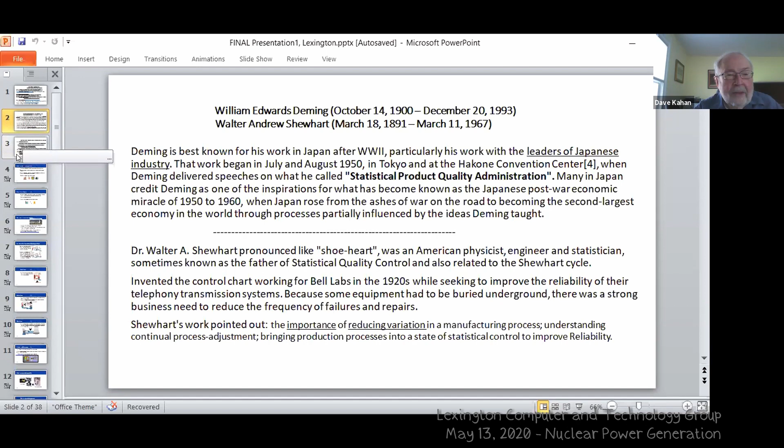Number three, the significant points of interest. Oh Steve, can I move that? You are sharing the screen. Can I move that green thing out of the way? How do I do that? Steve? David, it looks fine to everybody else. I don't think it's a problem. It's only you. Oh, it's only me? Yeah. Well, because then I got to move this, I got to move my slide up and down, because I'm reading it as I go along.

Okay, now what are the forms of energy?

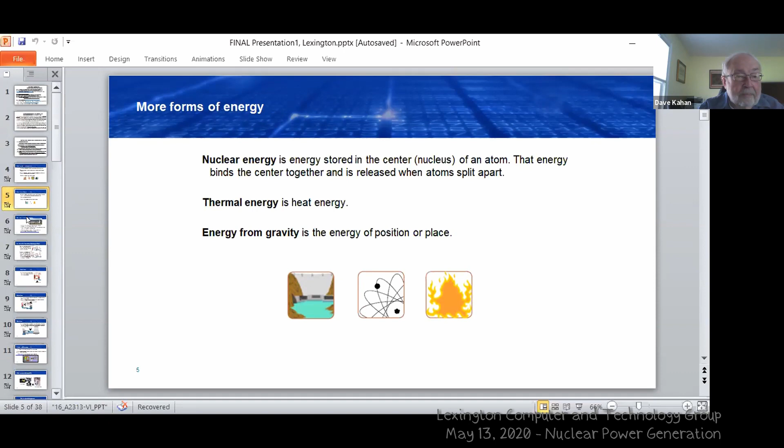I'm not going to go into all that, but atoms are split to produce steam. The steam turns the turbine, and the turbine produces a magnetic field, which in turn creates electricity.

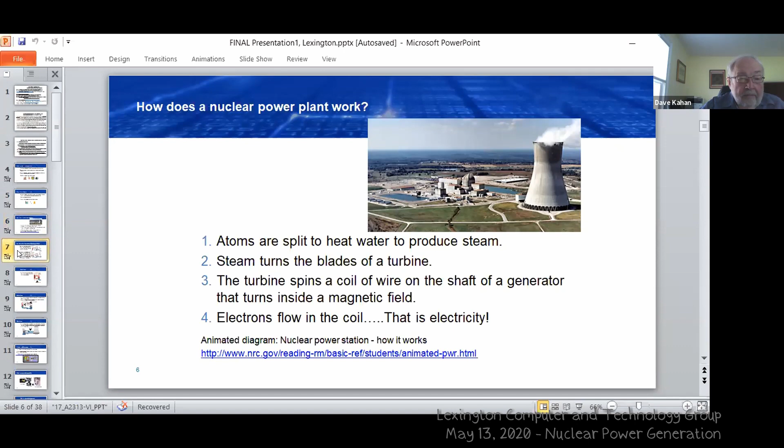Now, getting into the nuclear part of it, there are two types of nuclear power plants: the boiling water reactor and the pressurized water reactor. And we all know that when you put water under pressure, it doesn't boil at 212. It boils at a lot higher temperature.

With the boiling water reactor, I don't recall we ever really made those, because if you want to know the truth, I wouldn't want to work in a power plant that has radioactive water flowing through those pipes. That's just ridiculous. But the pressurized water reactor is much safer, where you get two different cooling channels.

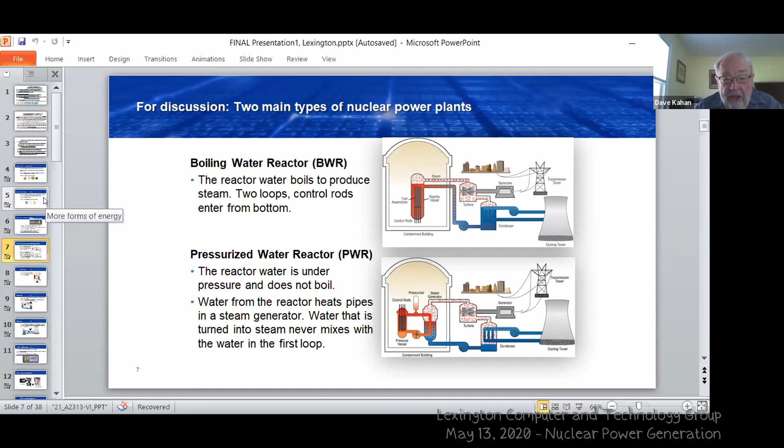And the other thing that comes up in the piping system is - I don't know how many of you guys are software engineers - but how do you predict the reliability of pipe? What you're really talking about is the reliability of the materials the pipe is made out of, how it reacts to radiation.

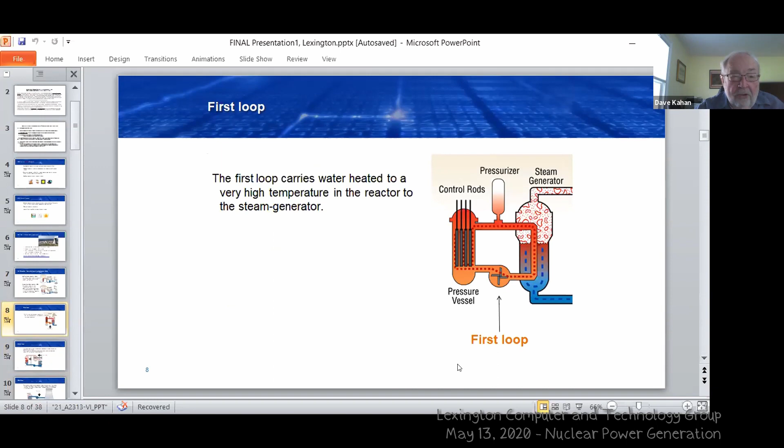The first loop of water is heated to a very high temperature in the reactor, and it goes to a steam generator. That's where what I call radioactive steam goes through the plant. And the second loop carries the heat energy of the steam to the turbines, etc.

So basically what we have here is one giant tea kettle, and you get different systems that supply heat to the kettle to get that pressure, to make the turbine turn and generate electrical power.

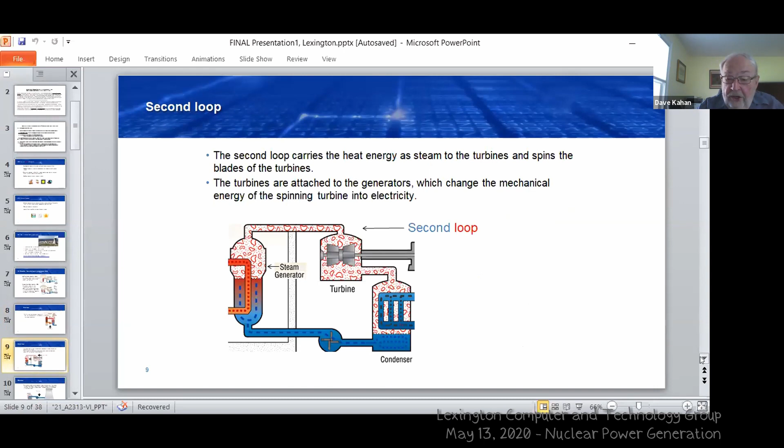Then the third loop is the cooling loop. Those cooling towers are humongous. As a matter of fact, fiber optics is used to go in there and clean all the tubes. Without fiber optics, you could never maintain the coils to keep that water flowing through.

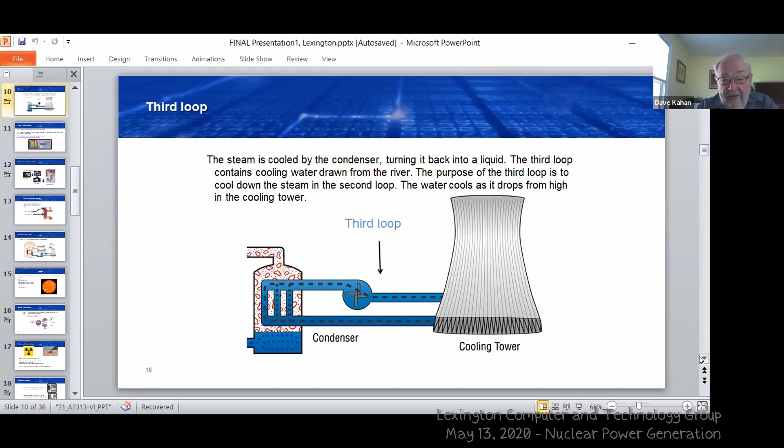So I'm not going to bore you with all the details because I think it's very simple. But the three loops' purpose is really to keep the reactor within the temperature range, and one loop never mixes with the other. Completely separate.

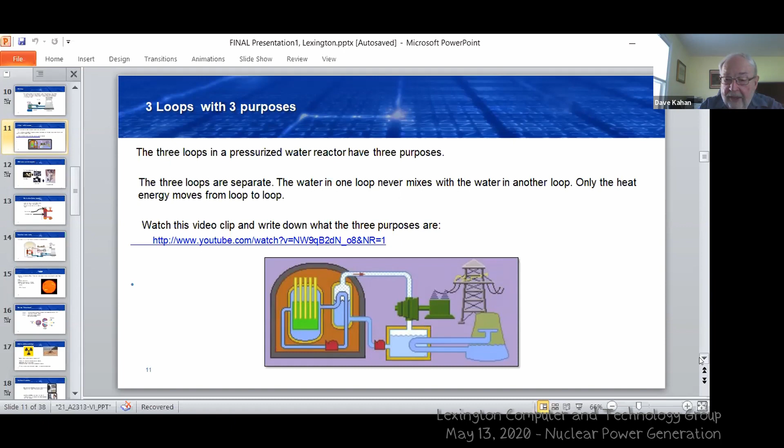Yeah, and to me, I can appreciate it because I never did see a nuclear plant when I worked there, but I did go to a fossil plant, and I'll tell you the truth, the size of the pipes there are scary. Now I know why they call them pipe fitters instead of plumbers.

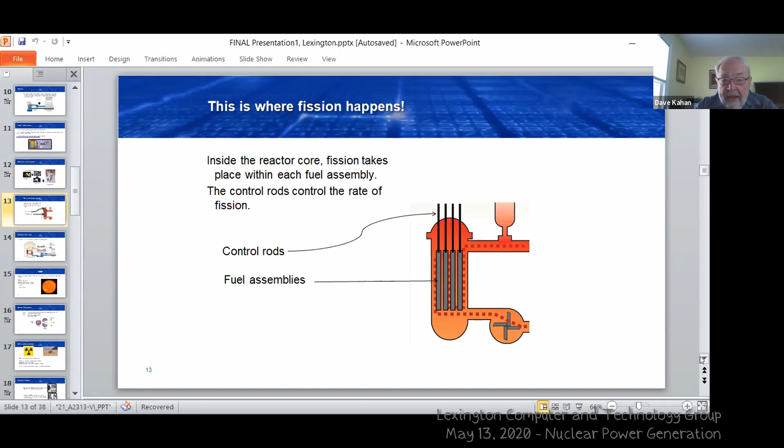So this is the inside of the core reactor where the fission takes place, and each fuel assembly has the control rods going up and down in it. Those are your...

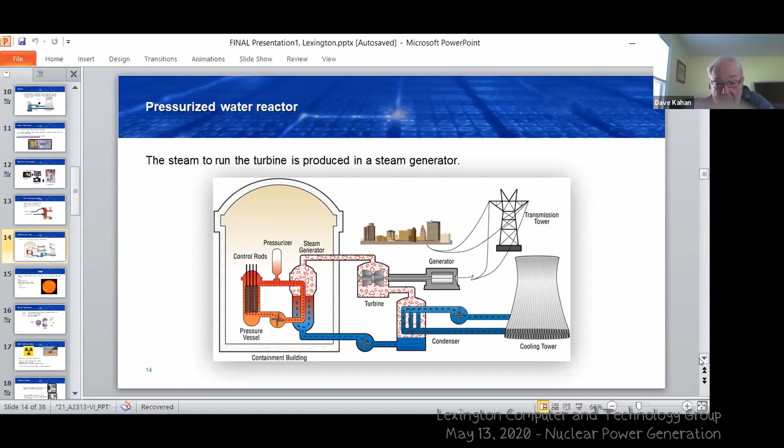Now for the pressurized water reactor, the steam to run the turbine is produced in the steam generator, and the steam generator is right next to the reactor. That way, you don't have as much radioactive water flowing through the plant. See that diagram, which is key.

Now, I'm not going to go into fusion. My friend Charles did a very good job on that, and this is all I'm going to say: it's the opposite of fission. The only thing I wanted to mention is ITER in France - they have the tokamak, the fusion facility. Have you guys heard about that?

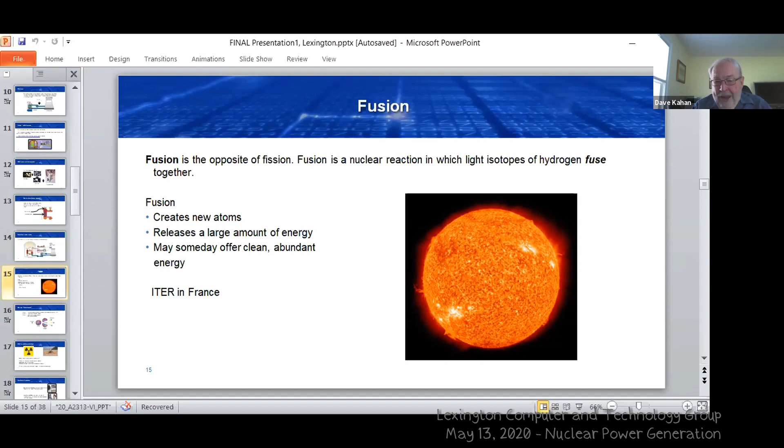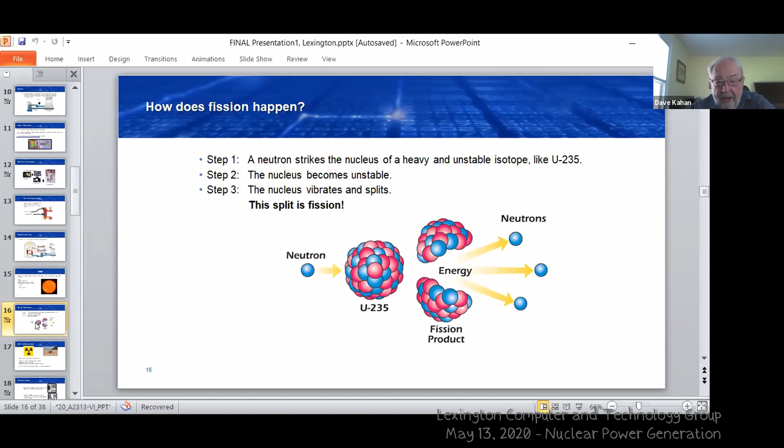The purpose of my talk was safety and what nuclear power is doing today. ITER is completely opposite in one sense - as I go into the more technical part of the reactor, we're trying to make the reactor small enough to put into a small factory, plug and play. Try to do that with a fusion system, it's impossible right now. So we're just beginning, we're not shrinking it. This is almost the same thing Charles talked about, what fusion is all about. It's really cool stuff.

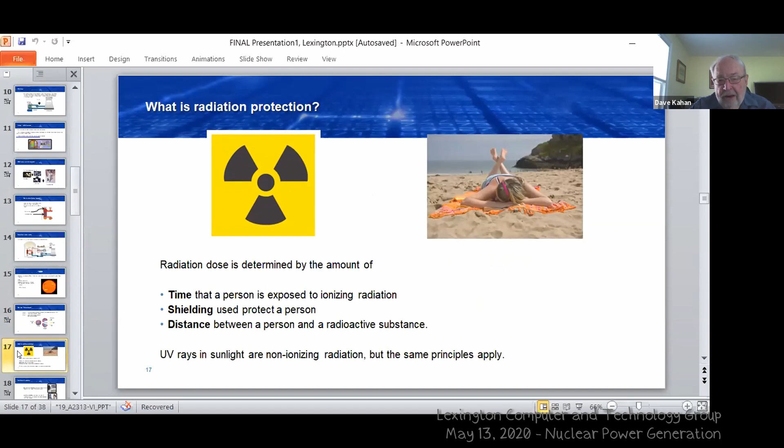So what is radiation protection? Well, it's time, shielding, and distance. In the electronics field, the only radiation I worried about was RF radiation, getting too close to radars and power densities. But that's a different story. If you stand in front of a 10 kMc microwave antenna, you might get cooked, because that's what your microwave is made out of - I think it's an X-band radar.

Then we have non-ionizing radiation, which is low energy, and it's the stuff we use in our cell phones and TVs, etc. But ionizing radiation is the high energy stuff, and that's the stuff that will change your genetic makeup, basically, from an atomic point of view.

And believe it or not, we are always surrounded by radiation. It's continual, and I think everybody knows that. I was surprised that even bricks are radiating stuff - that to me was quite interesting. But it's at a low level, so at least we can live to a ripe old age and it won't kill us most of the time.

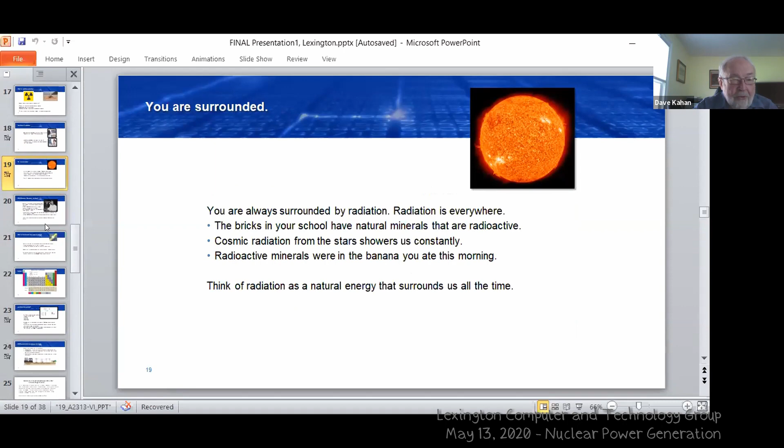Now I'm getting into the interesting part of the physics. Some of the elements, some of the atomic makeup, are unstable, and these unstable combinations are more likely to change. Although atoms are small, it was pointed out last week that it's the strongest force known in nature. I don't know if any of you watched the Science Channel, but they talked about two neutron stars circling each other that collided and blew up out in space. I look at the atom as the micro energy, and those two stars out there in the universe as macro energy - but they're related in the sense that everything is spinning and moving around.

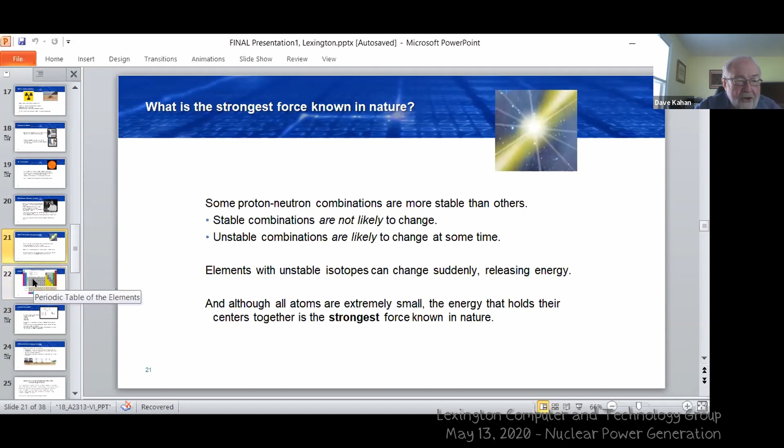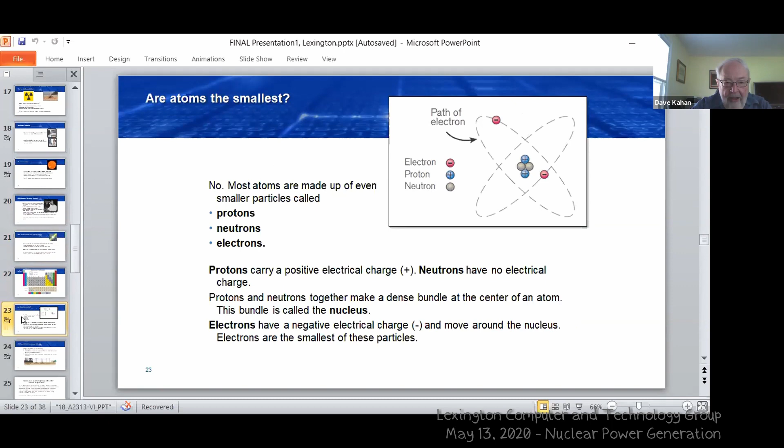It's just a thought. All right, everybody remember this from school? That's one of the things that helps you - this is what brought some scientists to realize that nuclear energy was a possibility. I'm not going to go too much into this, I'm just going to bring it out and show you the details of what's going on here.

Now, to get electricity to the customers, that's an interesting situation. You've got all kinds of power plants across the country, and we've all seen the power lines. However, some of the transmission mathematics involved are very related to microwaves - I remember standing waves, etc., that we studied in school. You use similar principles here to get the power to a house. But anyway, from an electrical engineering point of view, it's straightforward - wired across a great distance to a local distribution station, and right to our houses.

Now, I don't know if you guys ever read about the NRC and the AEC, the Atomic Energy Commission. In the 70s, the way the AEC and NRC were operating, it was obvious that if you're in charge of it and also regulating it, you can get away with murder. That's one of the reasons the federal nuclear organization changed the way it did, to the Department of Energy. They wanted to separate the guys promoting it from the guys regulating it, so there's better management control over the whole system, from the design concept right through building and delivery.

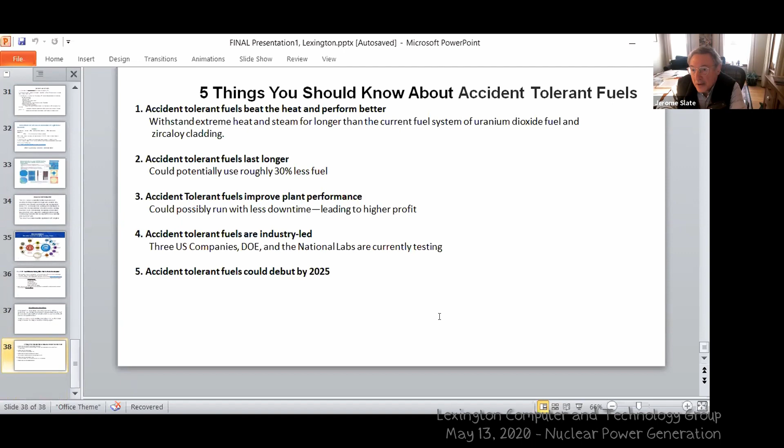I don't know, but what I will say is, if you really want to find some interesting stuff, you know, I'm such an old guy, my wife used to say engineers think linear, L-I-N-E, they think in a linear sense. Well, so did I. I was dumb enough to look up NRC. Well, NRC doesn't exist anymore. The AEC doesn't exist.

It all goes into the Department of Energy, you know, where you get gasoline and oil. I always thought of nuclear as separate, but the Department of Energy really took the personnel from the NRC and the AEC, and also people from the Manhattan Project that are still alive. They came out with a handbook, the DOE handbook 1132-99, which is similar to what I had to use when I worked at Stone and Webster in the quality engineering compliance division.

It was like a program office to make sure our contractor was doing the right things. One of the items I was going to talk about was the environmental impact statement. That is one big thing, and I think the greatest gift that nuclear power gave us is that any project now, whether it's nuclear or not, you do an impact statement. It may be costly, but it's worth it.

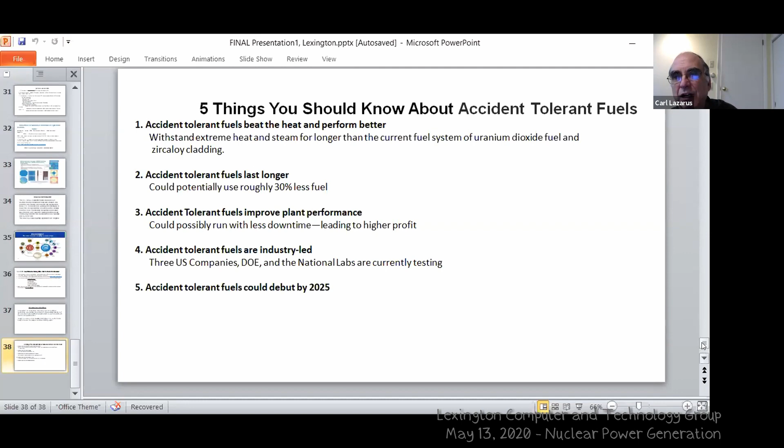So essentially you could burn up a higher proportion if you use faster neutrons, which has its own set of problems, but that's something that got partially developed and then was stopped by the U.S. government—fast reactors. The other thing is the idea of the molten salt reactor, which there's a little bit of research on, but the amount being spent on advanced nuclear research is really a pitifully small amount.

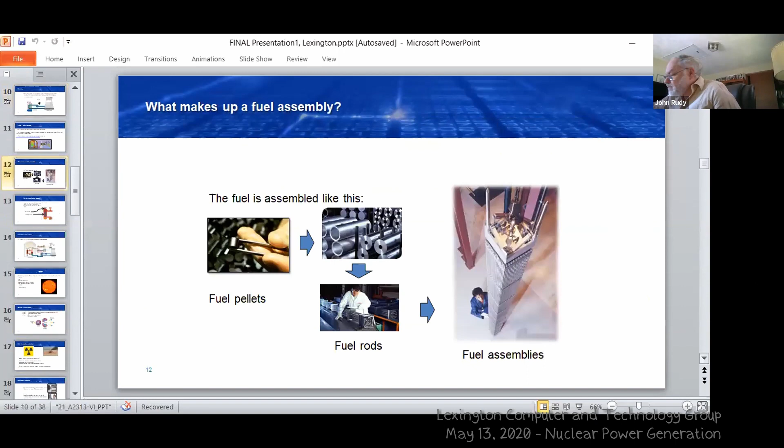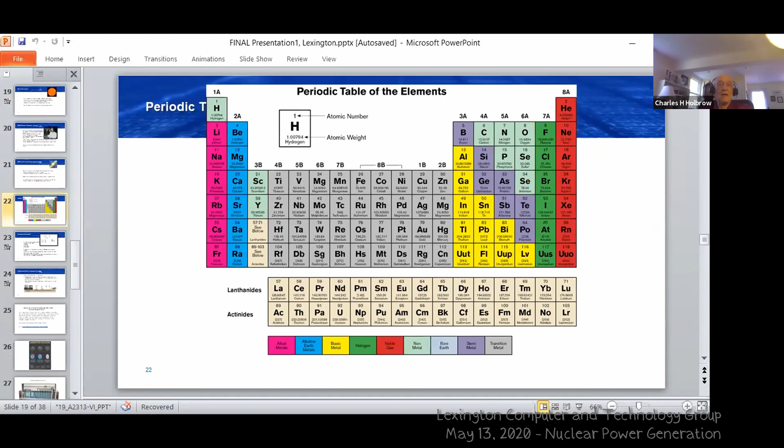Yeah, about those fast reactors, many of them relied on plutonium, which can be weaponized, and so that got the kibosh. I was going to point out that another constraint on the whole business is to not produce bomb weapons-grade material, and again, thorium seems to be less prone to that.

Yes, but one of the problems with thorium—this goes back 50 years for me—was that it wasn't as efficient as uranium-235. Is that correct, or have they solved the problem? The efficiency problems are being worked on. That's one of the things Bill Gates is investing heavily in. So the reactors aren't quite ready, but they're coming very close.

Right, okay thanks. That's why, if you remember when I mentioned this test reactor, the proposed versatile test reactor, the VTR—this is one of the purposes of that, to work with the materials involved to try to minimize this headache of what do you do with the nuclear waste. That's just one item, but that's why the modeling and simulation tools can help with that kind of processing.

Because I know, in my readings, I didn't realize how much I'd forgotten from the early 70s.

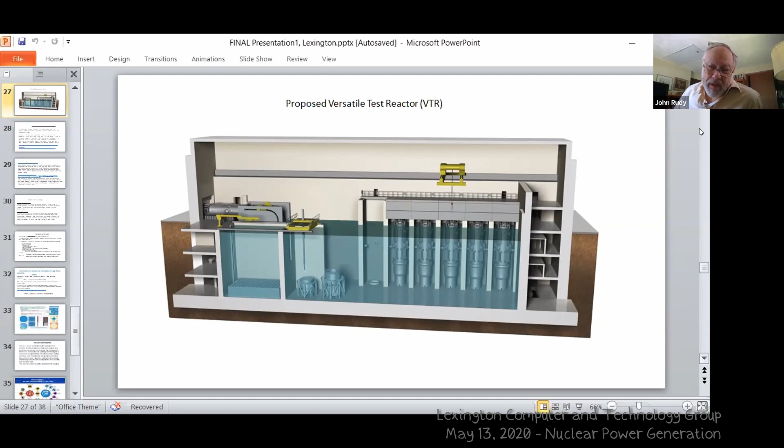We're talking about what do you do with nuclear waste, but bring that down to something much more simple, like what do you do with recycled plastic? As we learned maybe 3-4 years ago, places like China are no longer willing to buy it and bury it, and we can't even find a place, other than the ocean, to throw all that stuff away.

Obviously nuclear waste is a lot more complicated, but the physical volume of nuclear waste is much smaller. The other thing is the bulk of our energy today comes from burning carbon. What happens to that waste? It all just goes into the atmosphere. You can't even address technologically how to keep that out of the atmosphere, out of the environment. It raises the carbon dioxide content in the atmosphere.

Steve, lung disease is a problem. It is? Jerry might be able to spend a few minutes talking about that. I don't think that's a problem — it kept you employed for a number of years. Yeah, right, I don't see the problem with that.

Talking about nuclear issues, I don't know if I've sent this out — there was a great HBO series on Chernobyl that talked about what happened there and the work that was done to mitigate it, to the extent that it was. It was really well done, and I understand it's technically accurate.

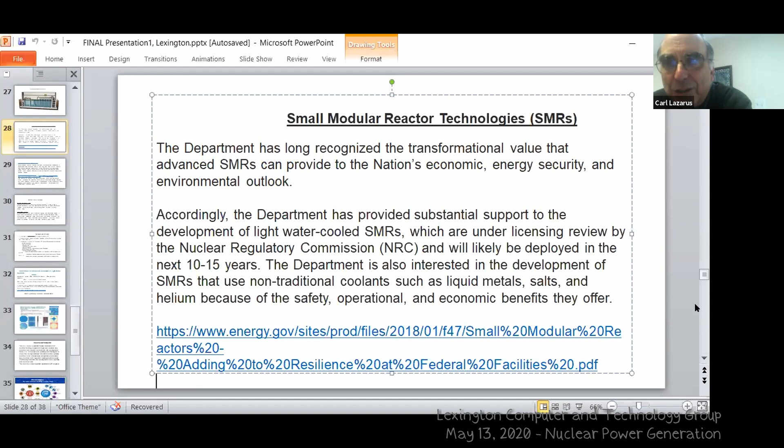Our cells have DNA repair mechanisms, and evolution has created a fine balance. If there were no mutations, then humans would never have evolved. In fact, nothing would have evolved from the earliest cells. So there has to be a certain rate of mutation, and on the other hand, too big a rate of mutation causes all sorts of problems. So we have a finely evolved mechanism to do just the right amount of repair, and that deals with a low level of radiation that's all around us naturally.

It's true that there's sort of no real threshold, but below a certain level, our cells mostly deal with it. Mostly, but those are the reproductive cells. We're talking about the rest of the cells.

They don't need mutations. Do you know what the 5 rems are that the Navy is using per year, or a quarter? 1.25 rems per quarter, actually. Where did that come from? How was it developed?

Well, again, it comes from the same place. People are trying to figure out how much the population can tolerate without having deleterious biological effects. And as Jerry and I have been talking about, it's all statistics. You can't say for certain anything about whether anybody's going to die or not. You just try to lower the probabilities. That's where that comes from, and that has changed.

The REM, RAD, Röntgen, all of those units have been used interchangeably, and they are to a great extent the same. It's what the agencies come up with, and it is good—it's well reasoned from a scientific standpoint, but it's not perfect.